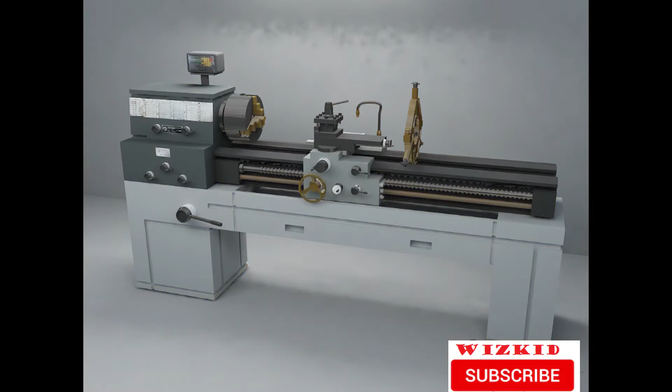Step-by-step procedure for cutting 60-degree threads on a lathe machine, including the procedure to set up a lathe for threading a 60-degree thread.

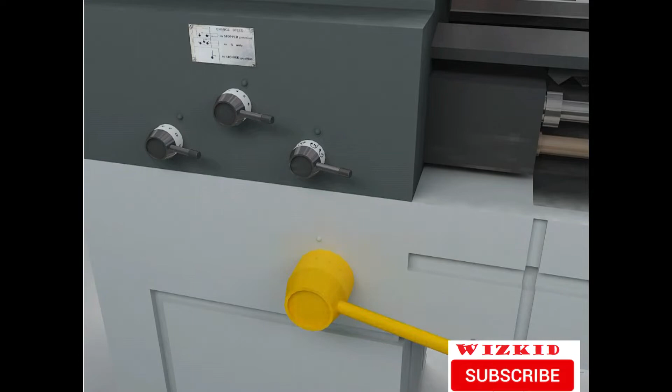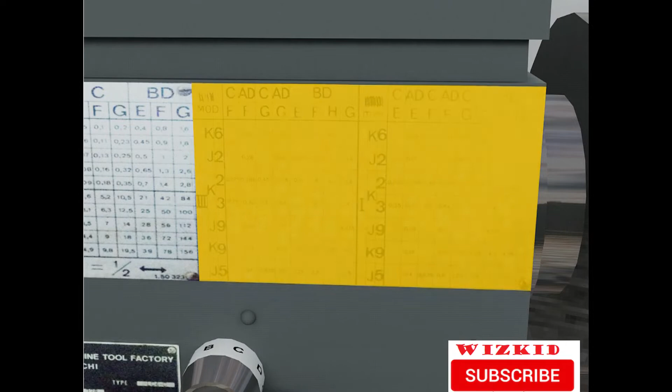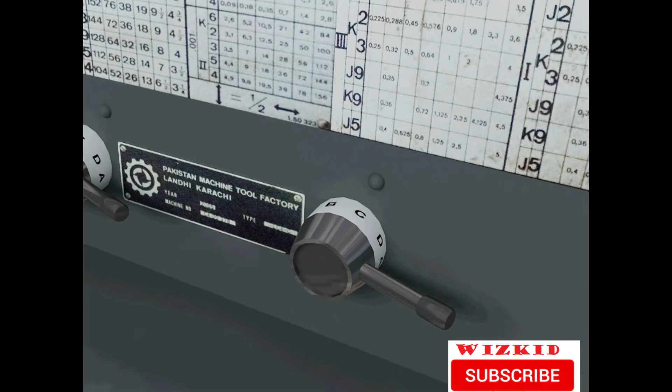Set lathe speed to one-quarter of the speed used for turning. Set the quick change gearbox for the required pitch, in threads per inch or in millimeters.

Engage the lead screw.

Secure the 60-degree threading tool bit and check the angle using a thread center gauge.

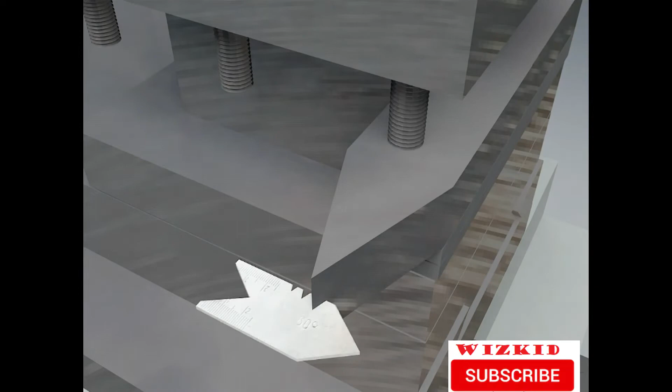Set the compound rest at 29 degrees to the right. Set it to the left for a left-hand thread.

Set the cutting tool to the height of the lathe center point.

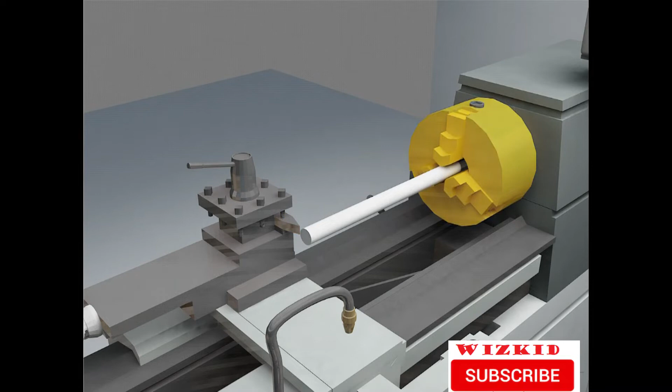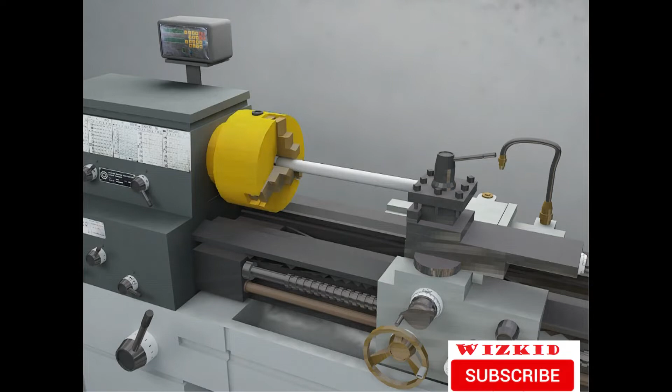Mount the work between centers. Make sure the lathe dog is tight on the work. If the work is mounted in a chuck, it must be held tightly.

Set the tool bit at right angles to the work using the thread center gauge.

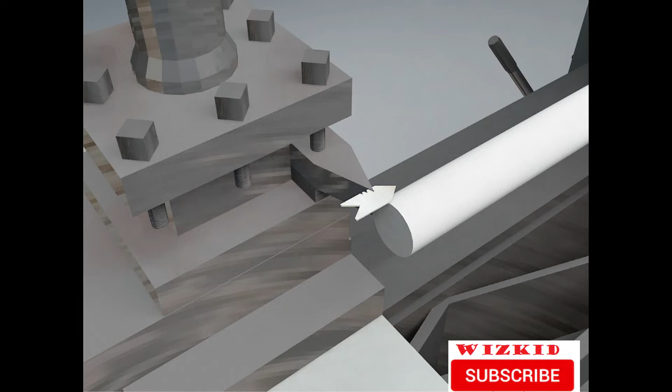Arrange the apron controls to allow the split nut lever to be engaged. This is the thread cutting operation, the procedure to cut a 60-degree thread.

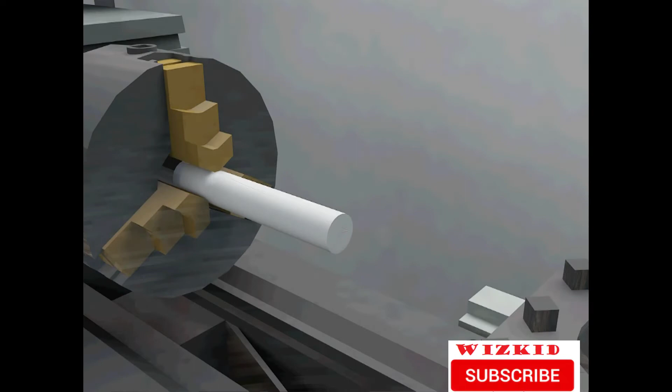Check the major diameter of the work for size. Start the lathe and chamfer the end of the workpiece with the side of the threading tool to just below the minor diameter of the thread.

Mark the length to be threaded by cutting a light groove at the point with the threading tool while the lathe is revolving.

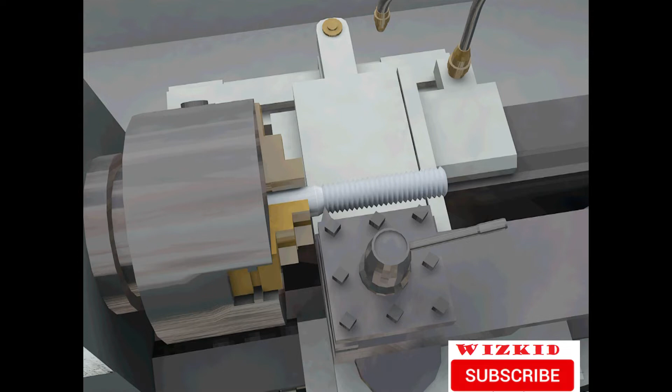Move the carriage until the point of the threading tool is near the right hand end of the work. Turn the cross feed handle.

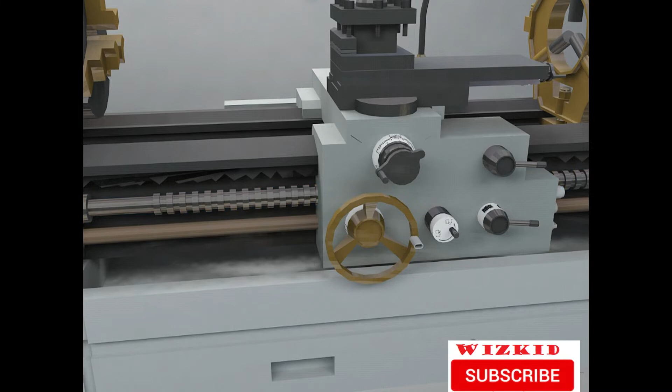Turn the cross feed handle until the threading tool is close to the diameter, but stop when the handle is at the 3 o'clock position. Hold the cross feed handle in this position and set the graduated collar to 0.

Turn the compound rest handle until the threading tool lightly marks the work. Move the carriage to the right until the bit clears the end of the work.

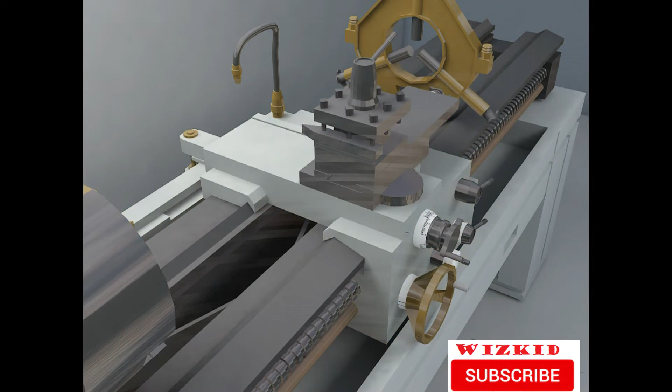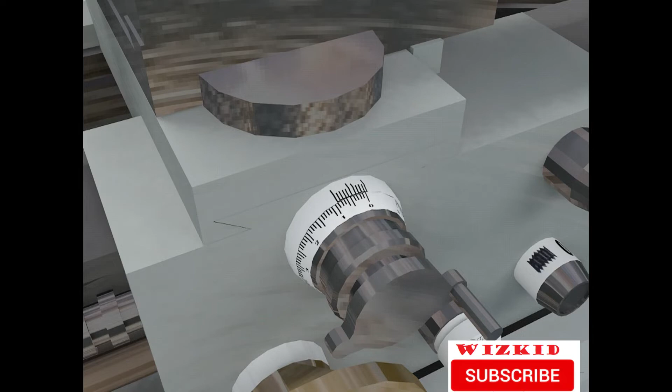Feed the compound rest clockwise about 0.003 inches. Engage the split nut lever on the correct line of the thread chasing dial.

Take a trial cut along the length to be threaded. At the end of the cut, turn the cross feed handle counterclockwise to move the tool bit away from the work.

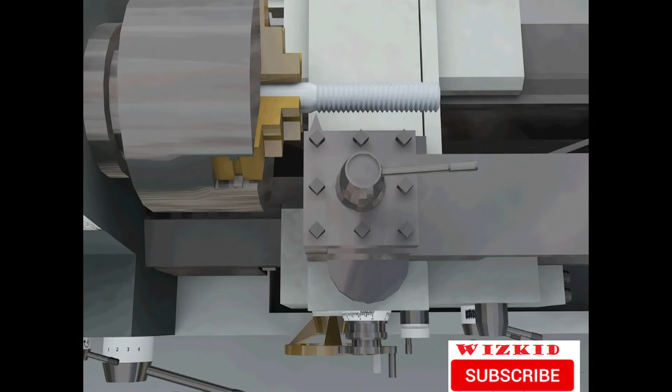Disengage the split nut lever. Stop the lathe and check the number of threads per inch with a thread pitch gauge, rule, or center gauge.

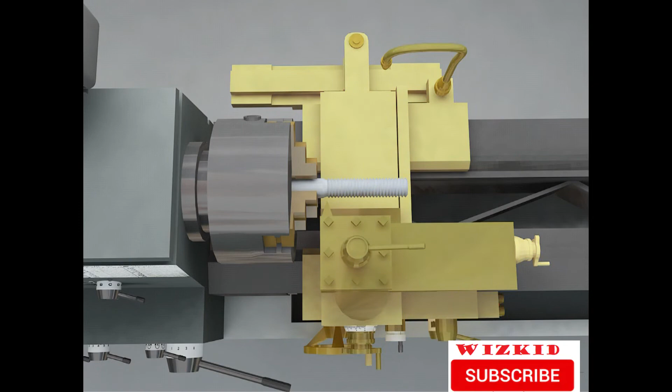After each cut, turn the carriage hand wheel to bring the tool bit to the start of the thread and return the cross feed handle to 0.

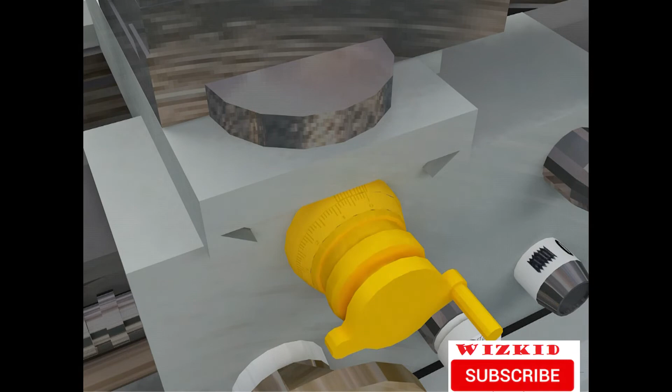Set the depth of all threading cuts with the compound rest handle. Apply cutting fluid and take successive cuts until the top crest and bottom root of the thread are of the same width.

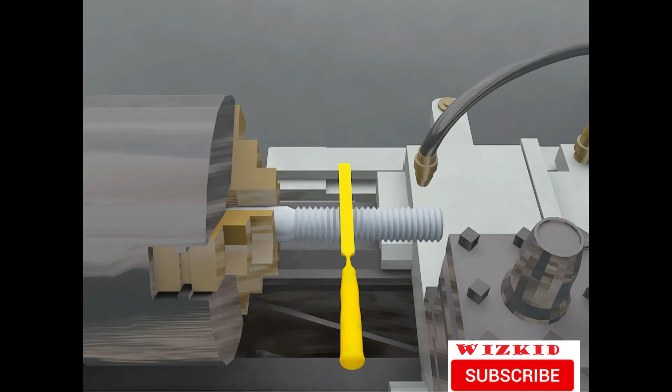Remove burrs from the top of the thread with a file. Check the thread with a master nut and take further cuts.

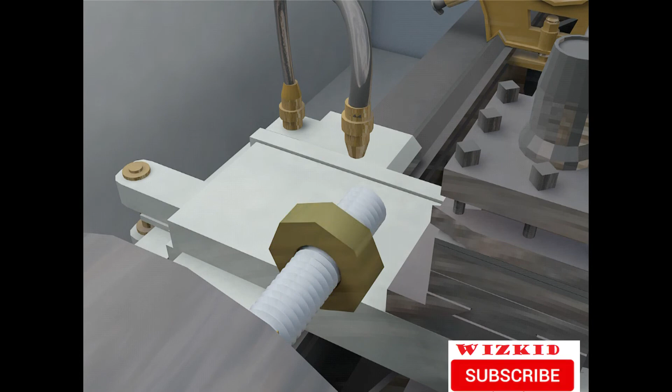There are six ways to check threads, depending on the accuracy required.

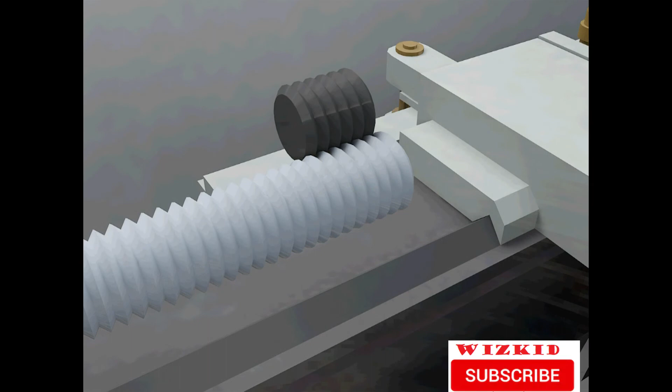These methods include the master nut or screw, thread micrometer, thread wires, thread roll or snap gauge, thread ring or plug gauge, and optical comparator.